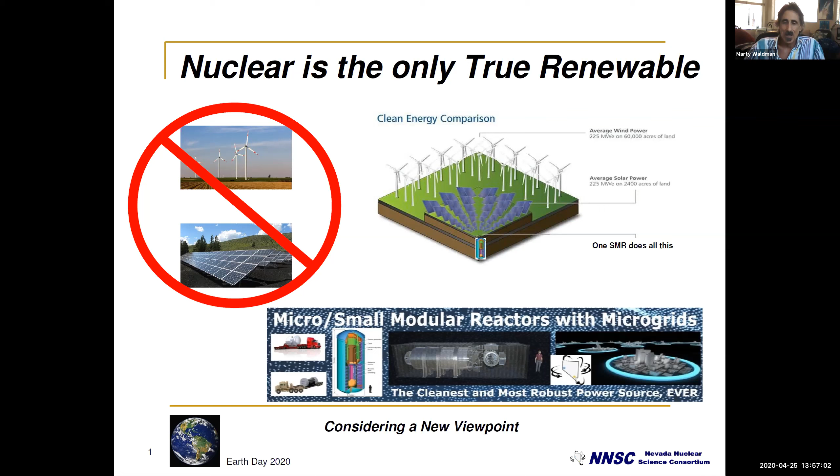Okay, so on here, just a little comparison. This is kind of a cartoon with artistic license, but basically showing you all those windmills in order to put out the approximate 200 megawatts, and then to have a solar field like we have at the border of Nevada and California, coming up I-15 by the border at Primm - a big solar field focusing on a tower. You can see what's required with land use.

And then we have just representative - one small modular reactor does all this, and you can even bury them. So it's just kind of a rough feel for the efficiency, the energy density of what we're going to be talking about here. So I guess we're ready for the next slide.

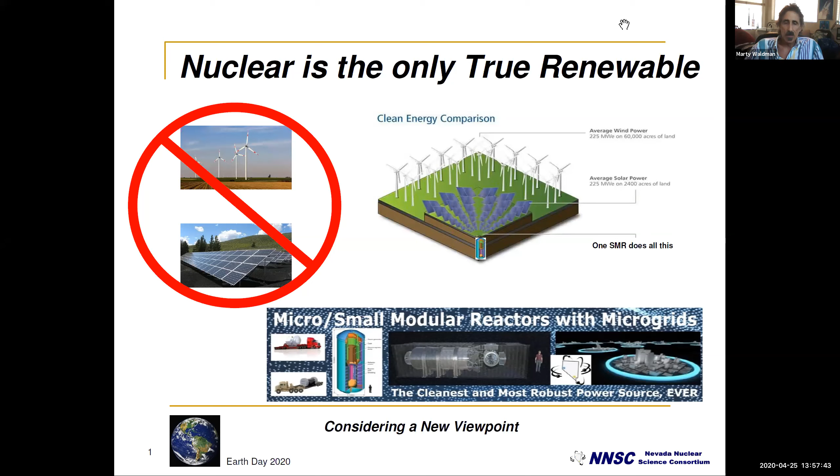Okay, so this was a big revelation to me. Again, I'm kind of new to nuclear.

I just came into this group about 1.5 years ago, so I learned a lot of things quick. I'd heard about Yucca Mountain, didn't know anything about it. I knew they weren't moving fuel there, so my natural question was, well, what are they doing with it now? I'd never thought about it until that point.

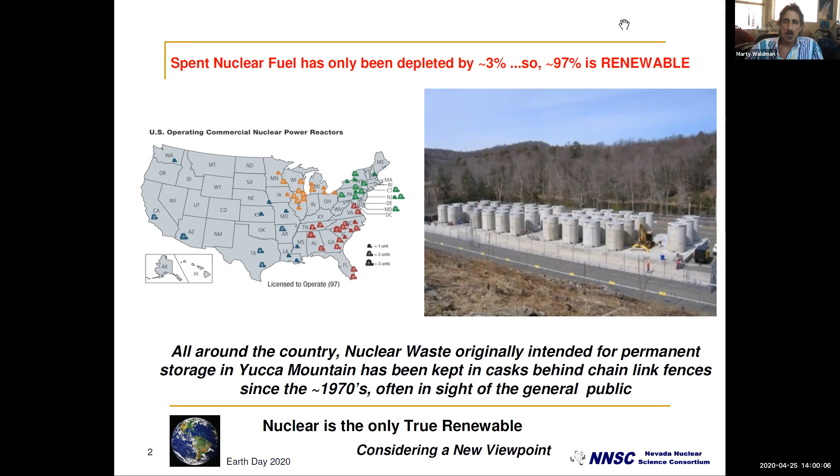A lot of lawyers have made a lot of money on this on both sides. So now we have this problem, like I mentioned, all that spent fuel piled up. What happened was, under Jimmy Carter, he made a decision for the United States not to do recycling of spent nuclear fuel. They had proliferation concerns. So anyway, that's a little background.

And then with our leadership here in Nevada, Harry Reid and all that, it never went forward. Nevada put their foot down saying no. The federal government said yes.

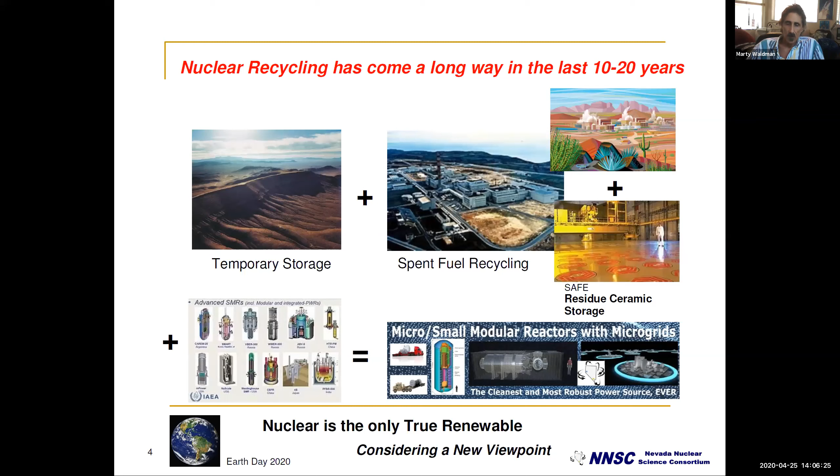Okay, so a little bit more just to familiarize yourself with this—this is our big thing here. The first reactor is going to be rolling out in about 2023, 24 or so. Our team here is working to get that tested here at the test site in Nevada. There's a couple of other sites, but we would like to test it here. We can do up to destructive testing here.

We have a full plan for the reactors, for what you do with the spent fuel from the reactors. We can handle the whole deal here in Nevada. We're also looking at not only temporarily storing the fuel in a queue so it can be put into recycling, but we would like to attract and have Nevada be the small modular reactor manufacturing capital of the United States. So the bottom line of all this is we're phasing over dependence from the very vulnerable national grid.

Power could go out in a second, or it might not go out at all. But if we don't begin this journey between now and 50 years from now, who knows what would happen. This is a phase-over process that would likely take about 20 to 30 or 40 years to do. It's an iterative infrastructure process. Okay, next please.

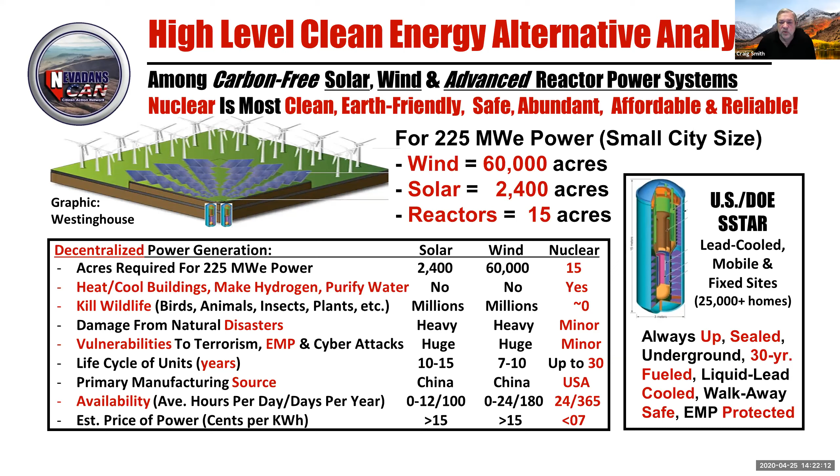I would also say that I don't view the expanded use of nuclear energy and its potential to positively impact environmental considerations as an exclusive argument. Much of the work done, especially with small systems, has focused on how you can integrate small nuclear power with other forms such as geothermal, wind, and solar.

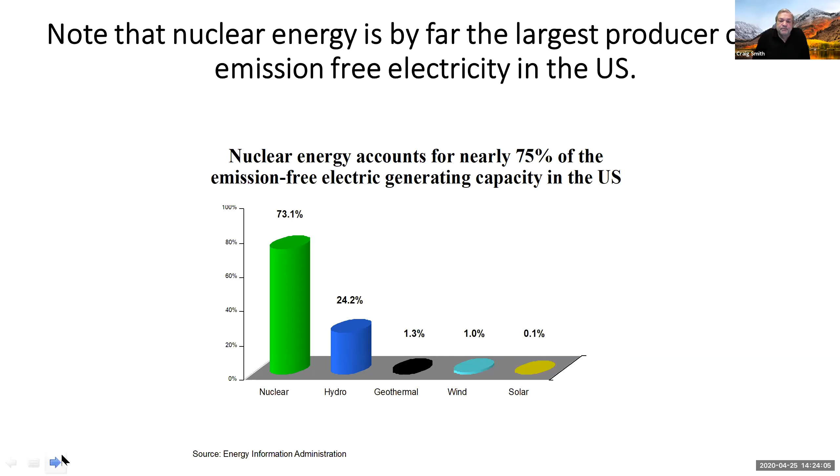So really that first chart I showed was sort of beginning in the middle. Let's go back to the beginning. What is the trajectory that has brought us to the current state of nuclear energy development? Just a little bit of an overview of the history.

Nuclear reactors were first introduced during the 1940s in the Manhattan Project. Following the end of the war and the successful development of nuclear weapons, which required the development of the first nuclear reactors as a method for generating materials for the weapons program, very rapidly after that the Navy realized ships could be powered by nuclear energy, and reactors for naval propulsion were developed. Then in the 50s, the Eisenhower Atoms for Peace program led to the commercialization and globalization, which was really a release of the Navy propulsion reactor technology into the commercial world.

Economics drove the designs to larger and larger sizes. There were four generations of reactor designs over the decades, with progressively reduced accident risk and improved safety. Of course there was Three Mile Island, Chernobyl, and Fukushima, each of which were hiccups along the way. These all relate to reactors that are either obsolete, in the case of Chernobyl, or earlier generations, in the case of both Three Mile Island and Daiichi, than what we're talking about here for advanced reactors and small and very small reactors that we expect to go forward in the next phase of nuclear energy.

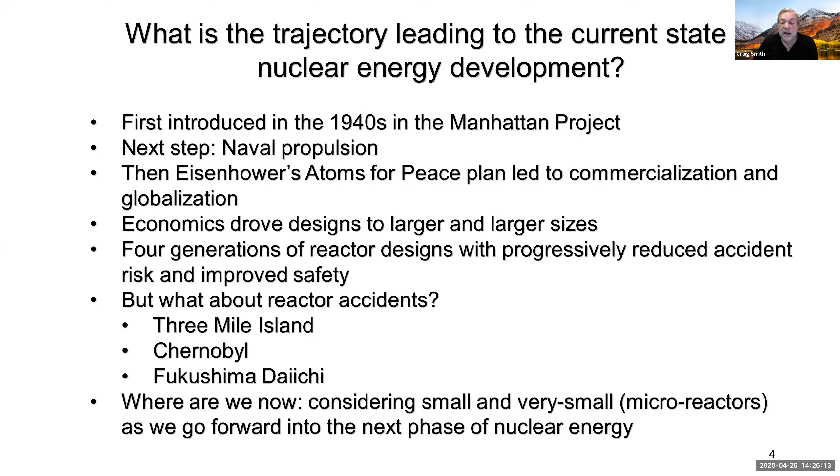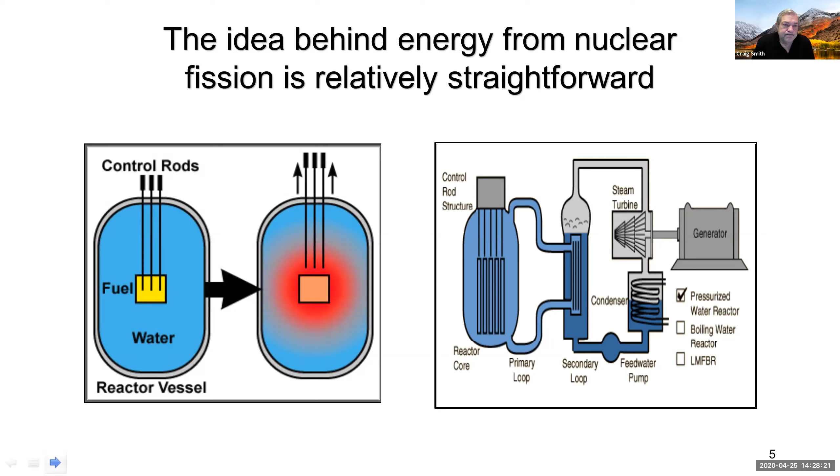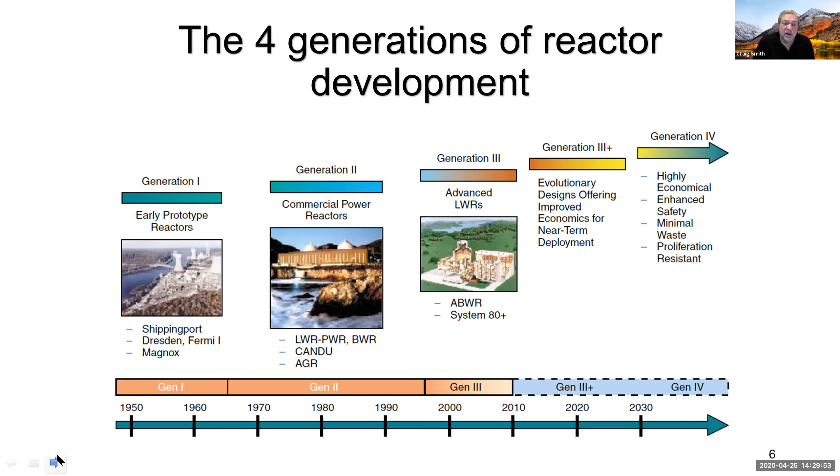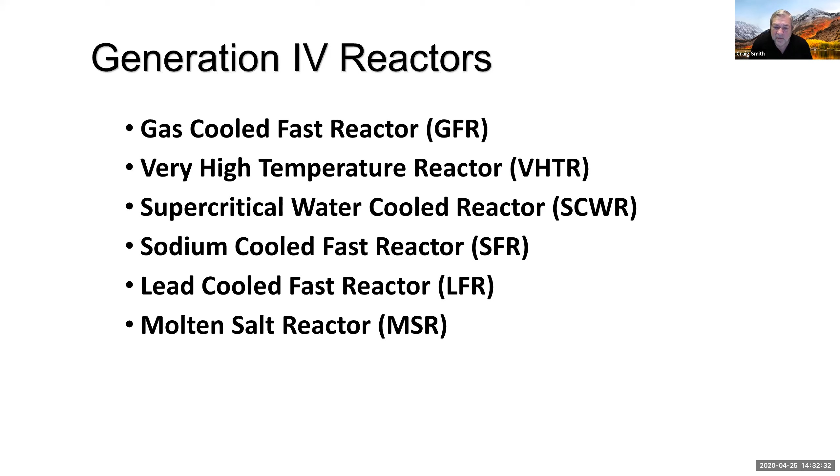For example, the small modular reactor mentioned in an earlier talk was the NuScale reactor, which is basically a pressurized water reactor—fundamentally Generation 3 type technology rather than Generation 4 technology.

So my point here is that small reactors can be Generation 3 or Generation 4. Advanced reactors are a different category. There's some overlap, but it's not a one-to-one correspondence.

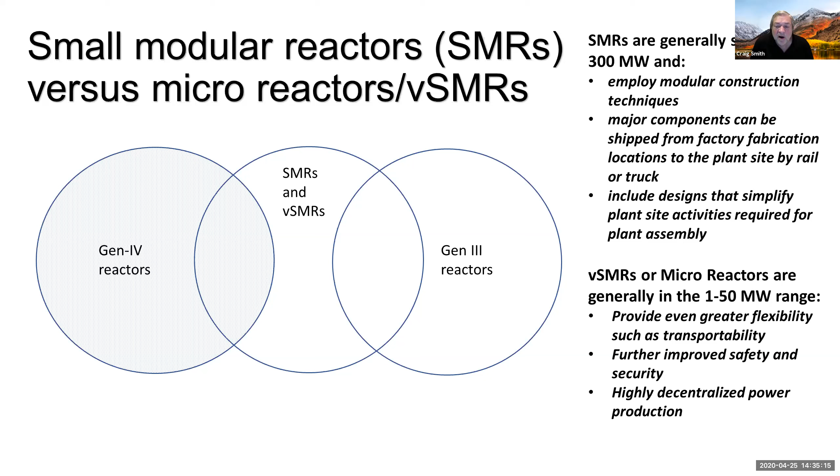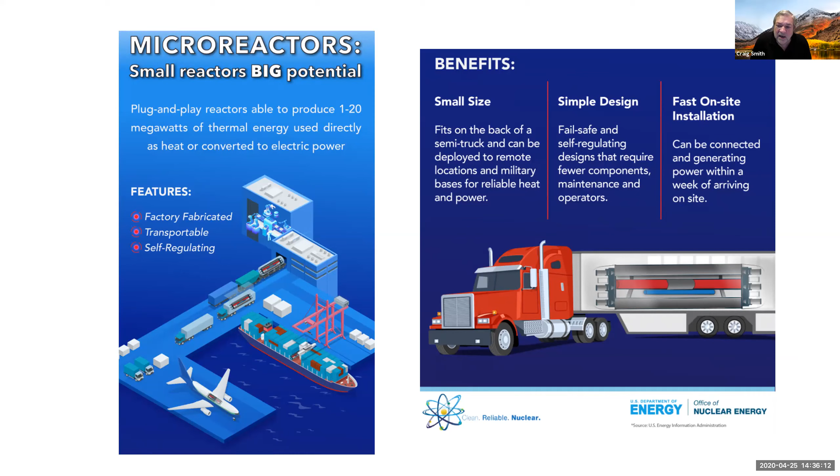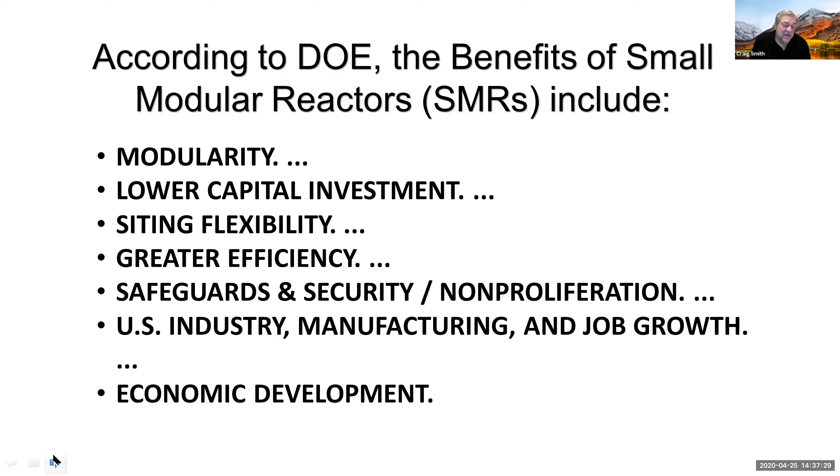There's siting flexibility, greater efficiency, and safeguards and security is always a big concern, especially for the Department of Energy, and in particular non-proliferation. Economic development is a final bottom line for this.

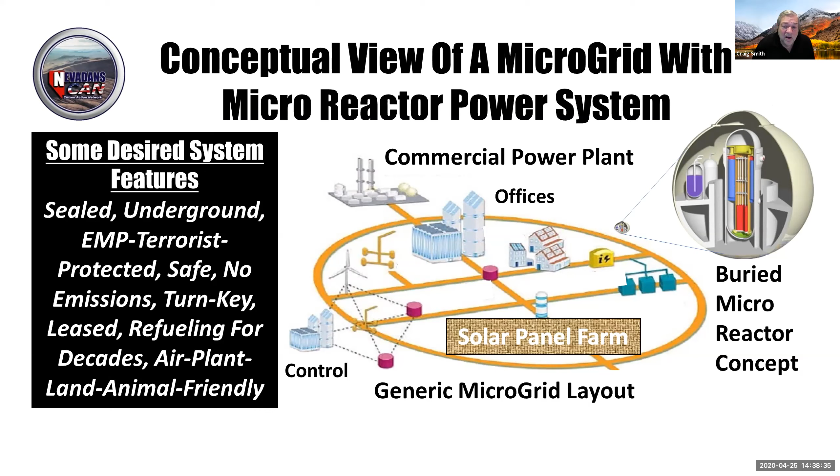Getting to the idea of a microgrid, and to make the point again that this is not necessarily a competition between small or advanced reactor technology and other renewables. Indeed, these small decentralized power grids, in many cases, cannot be successfully run with conventional renewables and need some other reliable power supply 24/7 to provide an anchor for the grid. You have the idea of a potentially buried micro-reactor integrated into a relatively small grid, which also integrates solar or wind, or both, and which could be connected to the larger grid, but separable in cases of grid outage or larger catastrophic failure.

Shifting to some of the kinds of reactor systems being considered, there are half a dozen pictures of things being developed now. NuScale was talked about before; it's shown here on a rail car as a module. General Atomics has a more compact but similar very small reactor concept, as does Westinghouse, shown on the pictures on the left.

On the right at the bottom, there are two lead-cooled reactors I'm very familiar with, one called Sealer, being developed in Sweden with the intent of implementing it in Canada for remote locations. It shows, in the cartoon, a picture of a man to give some idea of the size. The Holosgen and Hydromine concepts I'll talk about in the next couple slides before wrapping up, but these are just a small sample—there are many more under development.

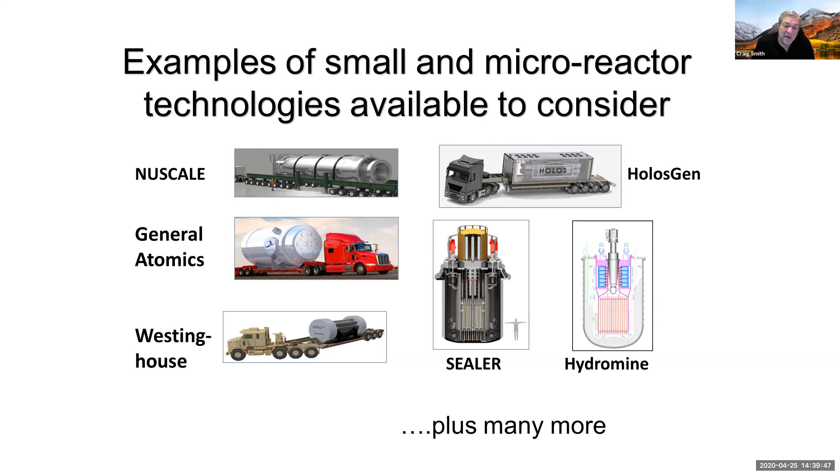The Holos reactor is shown here. I think it's an interesting concept in that it fits within a 20-foot shipping container. This particular design consists of 4 modules which can be shipped together as a new reactor, with a control rod or poison material that maintains their subcriticality. When installed, the criticality achieved by these 4 subcritical modules comes from the linkage that takes place when they're moved close together. They become either critical or subcritical by the mechanical action of moving those modules either closer together or further apart.

This is a very interesting technology that makes use to the maximum extent possible of off-the-shelf commercially available equipment, and it actually operates a little bit like a jet engine. The picture shown is a single 20-foot ISO container, a reactor generating in the 1 to 3 megawatt electric range. With 4 of these 40-foot ISO containers, you'd have a system generating 60 to 80 megawatt electric. The intent was for transportable, portable systems that could be deployed for the military to forward locations, operated at one location, and then relocated to a second location for continued operation.

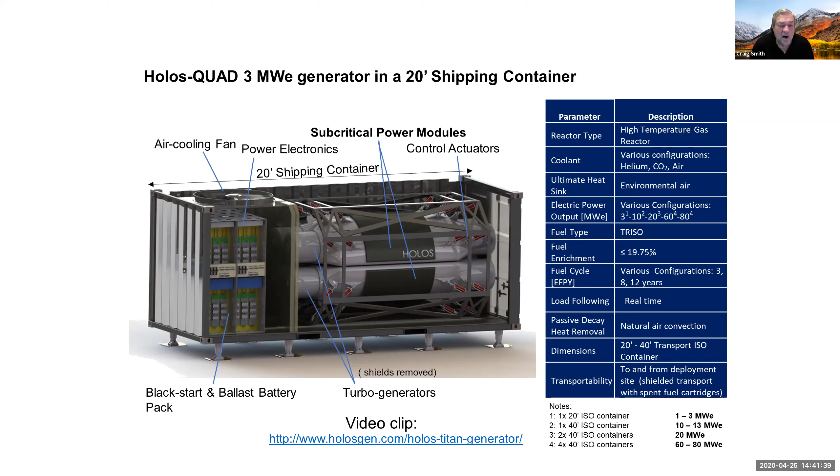There's a company by the name of HydroMine that has developed an unusually compact, very long life, very small reactor, which is transportable in the upright position. It's among the most compact power sources of any nuclear plant, producing greater than 1 megawatt electric per cubic meter of the primary system volume. It's passively safe with lead as the coolant, and there's a whole family of these ranging from 5 megawatts up to 20 megawatts in size.

One of the applications being looked at for this particular design is a ship propulsion application, which has the interesting feature that in the event of a catastrophic destruction of a ship with this power supply, the coolant would freeze. Lead will freeze very readily at environmental conditions, thereby locking in all of the radioactive materials in the reactor core for subsequent recovery in the catastrophic case. It's sort of a fail-safe design, an interesting concept currently under development.

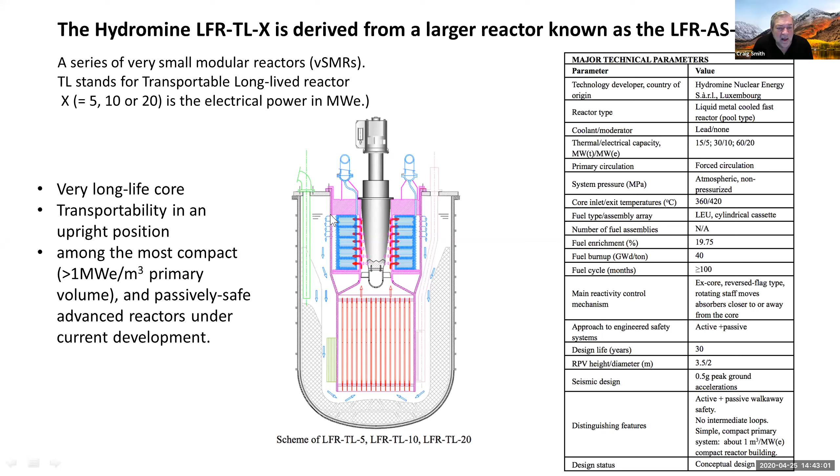So to wrap up, the work with Marty and the organization in Las Vegas relates to achieving grid independence with fixed or transportable micro power systems. Think giant battery. Think of a system that could be fueled for 20 to 30 years without being modified or refueled - safe, sealed, pollution-free, reliable, and EMP and terrorist protected. The application that Marty mentioned of Creech Air Force Base could be considered as a test site, and the need is pretty obvious there.

So I think by now we're running pretty late on time. We'll go to the next slide. And I'll say thank you, and that'll conclude my presentation. Thank you.